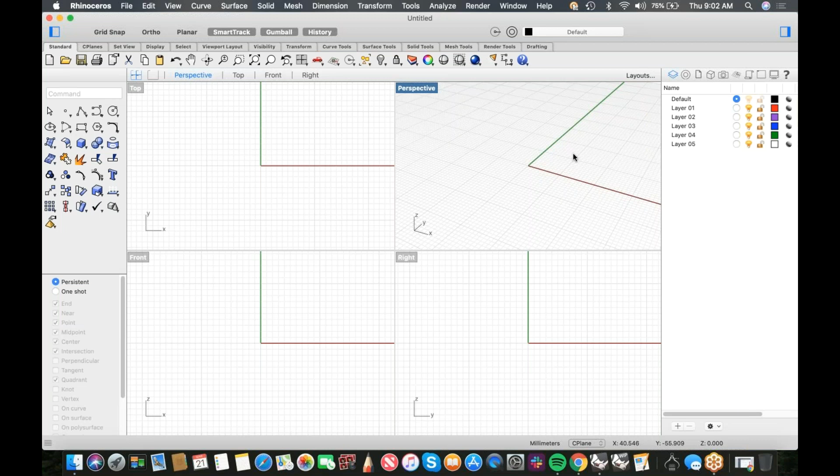So with that out of the way, let's talk a little bit about my setup here. If this looks different than your Mac Rhino setup, then what is possibly going on is that I am set up in the Windows theme. So if we go up here to settings, and preferences, and we go to themes down here, I'm set up Rhino for Windows. I primarily use Rhino for Windows, and so when I come over to the Mac side, I like to have the same kind of setup. I like the tabs at the top and stuff like that. It makes me feel safe and warm, so I use the Rhino for Windows setup on mine.

You can use either one, the Rhino for Mac, or you can set up your own custom, which would be a blend between the two. This requires a restart if you change this, so it's just the next session that you start up will have the different theme if you change from that, but this is why I'm running Rhino for Windows.

A few little differences between the Mac and the Windows side. We have these little drawers over here which turn the toolbars on and off, and same thing over here. Which makes it really convenient. You can set up hotspots on the edges of the screen. That's a Mac OS function. I don't have those set up. I find them a little distracting because I tend to work at the edges of the screen sometimes, and I find that a little disturbing, so I don't run that.

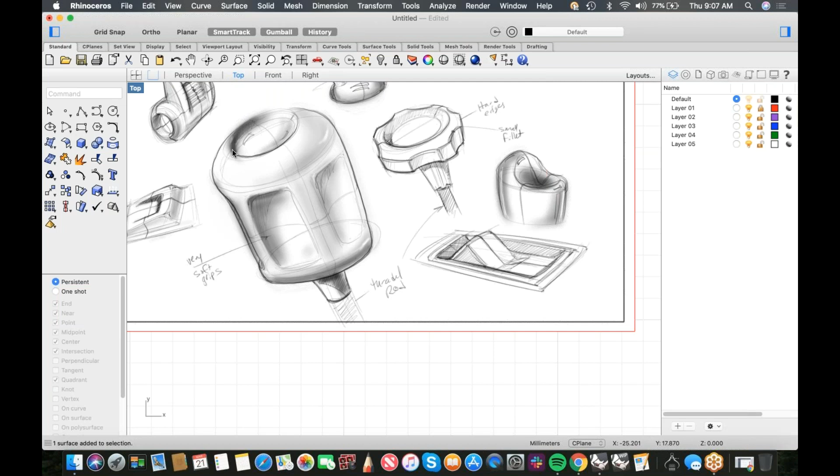And this shape, if we take a peek at it, it's got a little domed top on it. Maybe there's a label under a clear lens. And then it's got a little return here, and then maybe this breaks a little bit, and this is soft, and then it makes a soft turn here, and a soft turn here, and then it has this little barrel at the bottom, where we have a threaded rod poking out.

And I'll show you a cool trick for how to do threaded stuff. The trick is to never model it. We steal it from McMaster Carr, and that's actually a pretty fantastic resource that I'll show you. So the first thing I want to talk about is corners and NURBS. If you've done NURBS modeling for a while, maybe you already know it, but a surprising number of people don't understand this concept. Basically, NURBS corners require 3 points, right?

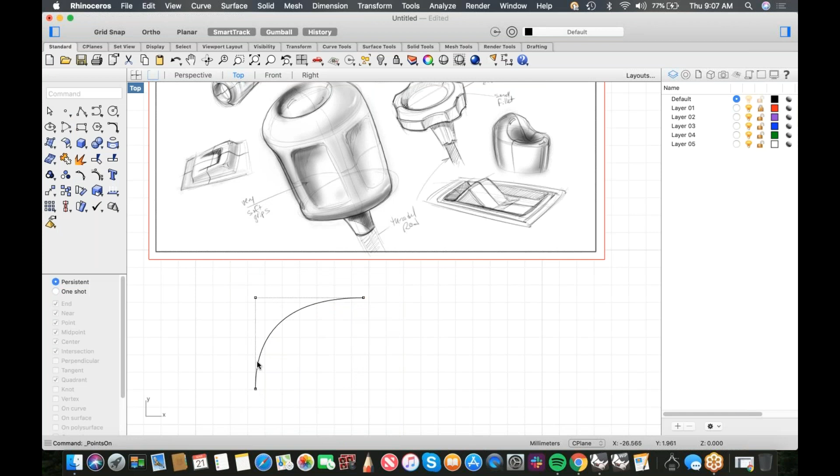If I turn the points on for this thing, I've got 1 point here, 1 point here, 1 point here, right? And if I move this point closer, it changes.

Now my dog's going to bark. Hang on, let me shut the door so she doesn't bother us. If you come to many of these webinars, my dog makes a frequent appearance in these. That's Lucy, the 3D modeling pit bull.

So if we're going to make a shape in another direction, 1, 2, 3. And I turn the points on for this. So I've got 1, 2, 3, 1, 2, 3, right? Now, if I do this with a single curve, I go 1, 2, 3. Now, if I want to start going down, I can actually steal this point and use it as one of my 3. So I can start coming down here, 2, 3. Now I can steal this one again, and I can come up here, 2, 3.

But the structure is the same. So my corner is 1, 2, 3. My corner is 1, 2, 3. My corner is 1, 2, 3. Right? So it's always in 3s.

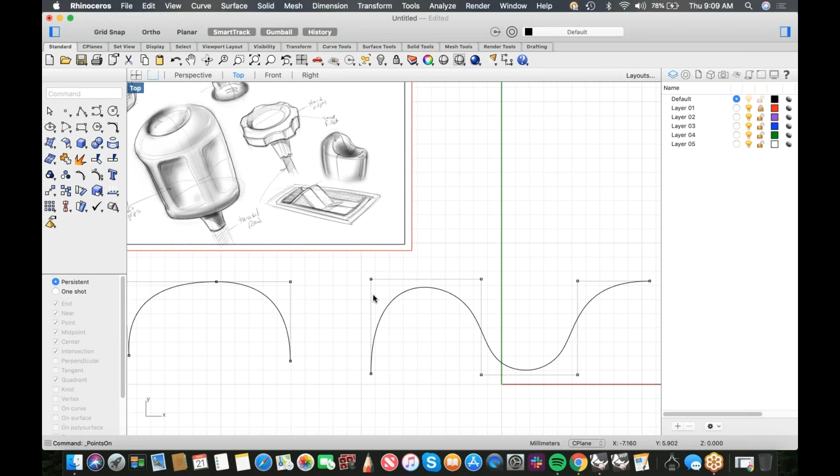Now, if we want to be able to isolate these, because I had to steal this point in order to make this corner, and I also have to steal this point to make this corner, they're kind of related. I have to isolate them. So that means I have to go 1, 2, 3, and then I need another point, 1, 2, 3.

And then I need another point, 1, and then I need, so that's that one, then I go 1, 2, 3, okay? So when I turn this on, now I've got 3 points here that make this corner, 3 points here that make this corner, and I can adjust it by pulling these closer together, farther apart, but I can also adjust the sharpness of the corner by pulling these points closer to the middle, right? Or I can soften it by pulling them farther apart.

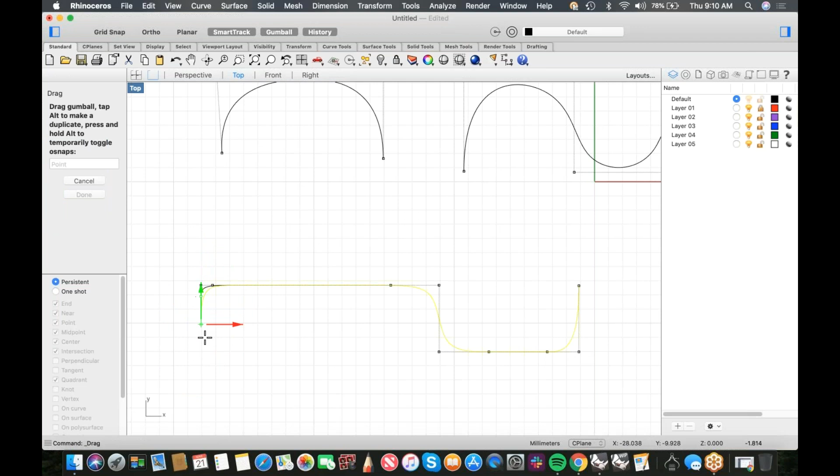And this is going to be an important thing to understand because the way this thing is built, basically we've got a corner, we've got a soft corner, we've got a soft corner, we've got a corner, and we got to isolate this from the next one, right? So I've got to have 1, 2, 3, 1, 2, 3, 1, 2, 3, 1, 2, 3, right? So I got to have 3, 6, 9, 12. I got to have about 12 points in order to make this thing happen.

And I did this video yesterday for the Windows side, so I have a little bit of a cheat built in already. And I know that when I revolve this thing, I want to have 49 isoparams in order to be able to get 6 divots in this thing. That's the way it worked out yesterday. So I'm going to spare you watching me do math, which is a painful process for all involved, and we'll just go from here. So let's start.

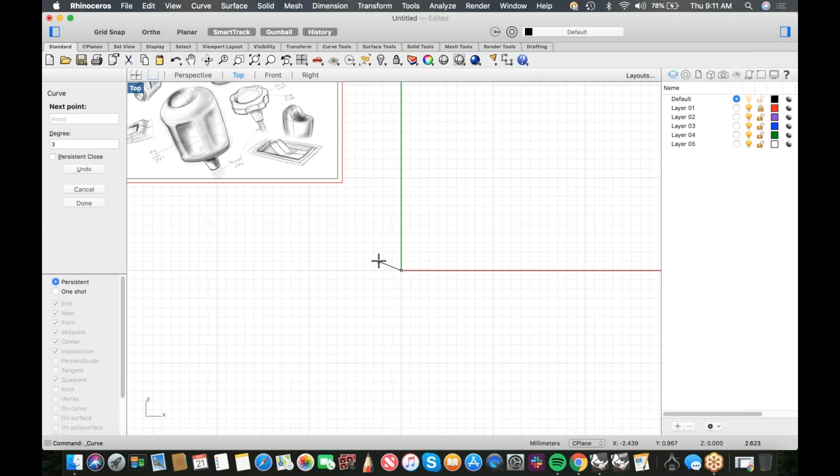I'm going to start at 0 just because it's easy, and I'm going to come out a little bit. Actually, no, I'm not going to do that because I want to get this bulge in here, right? So I'm going to start with a straight line, and maybe we'll turn on grid snap up here, and we'll start maybe here to here, and then I'm going to turn grid snap off, and then I'm going to mirror this around 0. And this is a nice way to make bulgy stuff.

And I'm going to use a 3-point arc because that one is super easy to use. So I'm going to snap it here and here. And then I know my center point is lined up right on the middle. So then I can decide how much bulge do I want this lens to have. And I want it just to have a little bit. So I'm going to just pull it something like this.

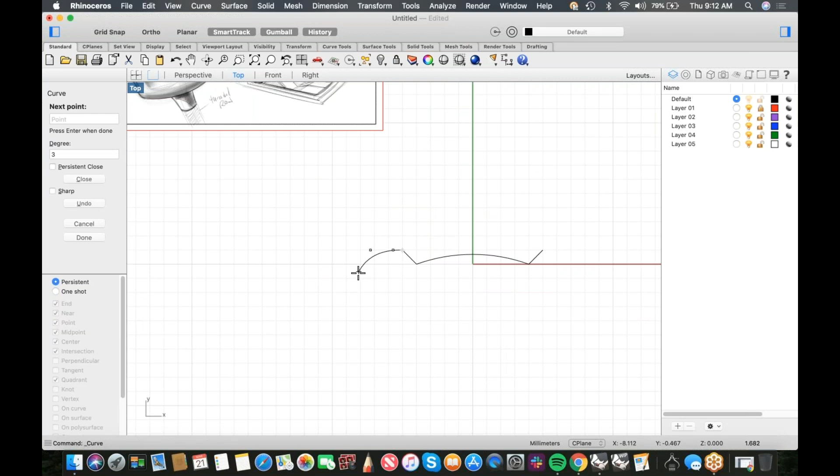Now I'm going to go back to control point curve, and I'm going to snap to here. I'm going to shift drag out from my first point. Now I got to make my first corner, right? I got to make this roll right here. So I'm going to start placing, maybe I'll do it close. 1, 2, 3. That's my corner. Now I'm going to come straight down to about here. 2, 3, that's my corner. And then I'm going to come back and I'm going to snap to the midline here. All right, so that's my shape.

And I'm going to set up a center line just to have it in place because it's nice for trimming, especially with revolved stuff. Use the trim command to get rid of this. And I'm just going to get rid of that because I don't need it anymore. And so now I've got the shape of my object, right? And I can decide, do I like this shape? Do I want to turn it?

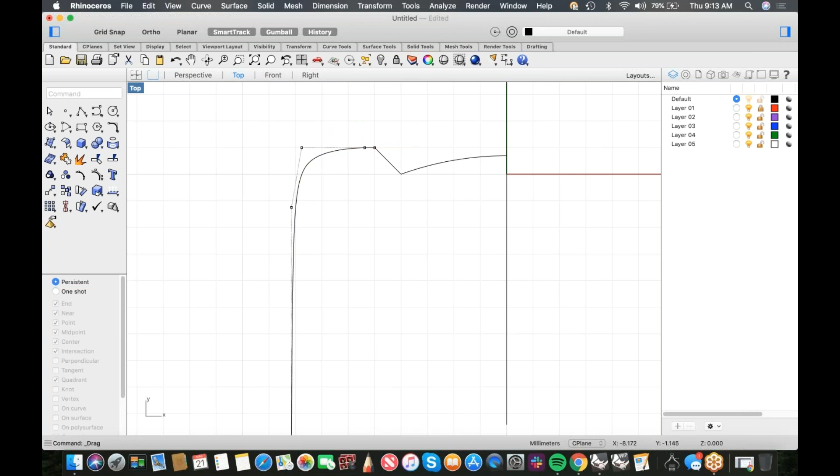Do I want to adjust it a little bit by moving this point? Maybe I want to sharpen that a little bit. Maybe I don't. Maybe I want to soften it a little bit. I can do that here. All right, so that 1, 2, 3 formula allows us to really focus on these corners and get them dialed in the way that we want. And I'm going to really soften this thing up a little bit. Join this up.

And then let's revolve it. Let's go to perspective view. And we'll just use the revolve command down here. And we'll snap from here to here. And then I want to just use a full circle. So I'm going to just roll this around like that. And this gives us the basis of what we want to mess with.

Now, this is a polysurface, so I can't turn points on. If I try to turn points on for this, it's going to say, can't turn points on for polysurfaces. See this down here? So I have to explode this, and I have to work on just this part. So I'm going to isolate that.

And if we turn the points on for this, you'll see that I don't really have enough points to mess with. So let's run the rebuild command. And let's rebuild this thing to 49. And then let's run it in the other direction.

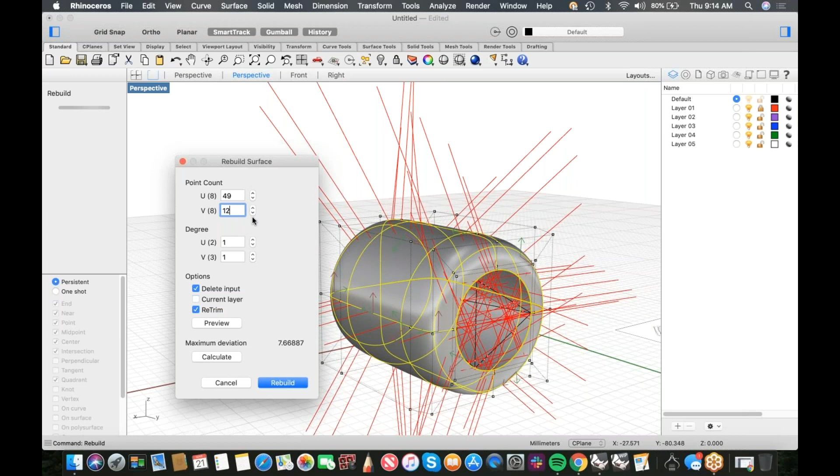I need to dip down, so I'm going to need 1, 2, 3, and then I got to come over. So I'm going to have another one, 4, 5, 6, 7, 8, 9, 10. Let's go about 12 points in that direction. And let's preview it to make sure that it did what we wanted to do. So that looks correct. So let's go ahead and rebuild it.

I'm going to delete the input, and now, oh, went degree 1. Don't want that. Let's rebuild that. Have to change the degree to 3. Otherwise I get facets, and I don't want facets. So let's preview that. That looks better. Let's rebuild that. All right, so now we've got enough points to work with, right? I've got stuff that I can play with now.

And so now what I want to do in the top view, I want to determine kind of where, let's get a point set up right on the origin. And actually this line of points is set up right on the origin, and that's actually the seam. And I don't want that seam to be the origin because I don't want a seam to be running through the center of my object.

By the way, I don't know if you know this, but there's a command called SrfSeam that you can actually move this seam anywhere you want. So if I put it over here, the seam moves from here to here. Sometimes that's useful in case you have to trim something through a closed surface. But I'm not going to worry about that.

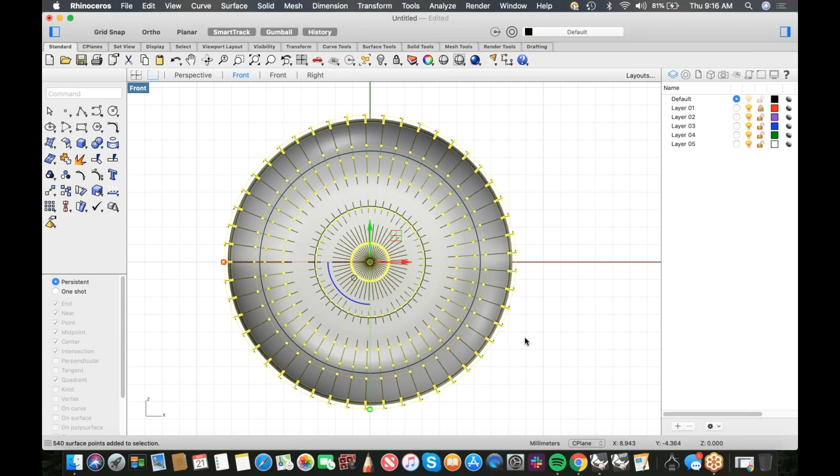But what I am going to do is I'm going to rotate it so this row of CVs is directly on one of these, because that's going to allow me to do some correct counting. So I'm going to rotate from 0. I'm going to snap to this point, and then I'm going to hold down Shift, and I'm just going to align that. Because now this is my symmetry point.

I can go 1, 2, 3. That's my center. 1, 2. So I can get like 5 points in this direction. But I'm gonna go a little farther. So I'm gonna pick these guys, and I'm gonna go 1, 2, 3 past the center point. So 1, 2, 3 over here. And then if I go to the top view, you can see that I've got these guys all selected, right?

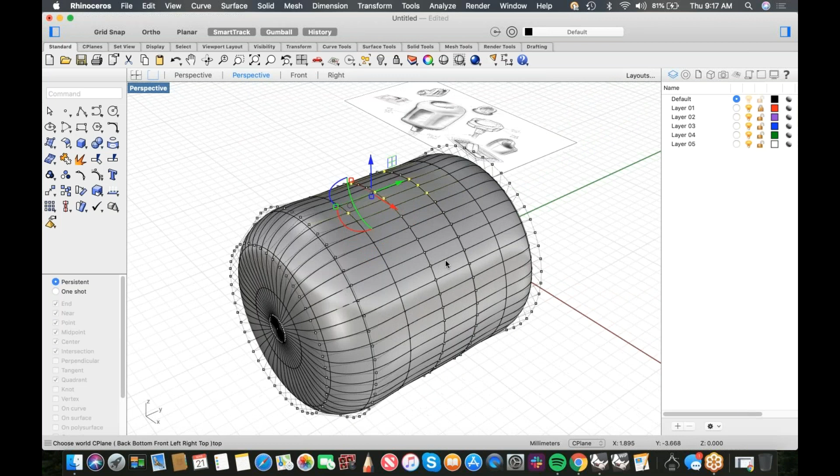Now I'm gonna deselect these guys because I don't want to mess with those up there, and I don't want to mess with these down here. So now I can go into perspective view, and I've got enough stuff that I can now start sculpting with this. And it looks like I missed a few. So let's go to wireframe, make sure I've got the ones that I want. Looks like I missed a few.

So let's do this. I'm going to drag select all of these, make sure I get them. And then I'll deselect in a different view. That looks better. Go back to shaded view so we can see what we're doing. Now we've got everybody selected. So now what I can do is I can just pull this straight down and add my soft little pillowy shape in there.

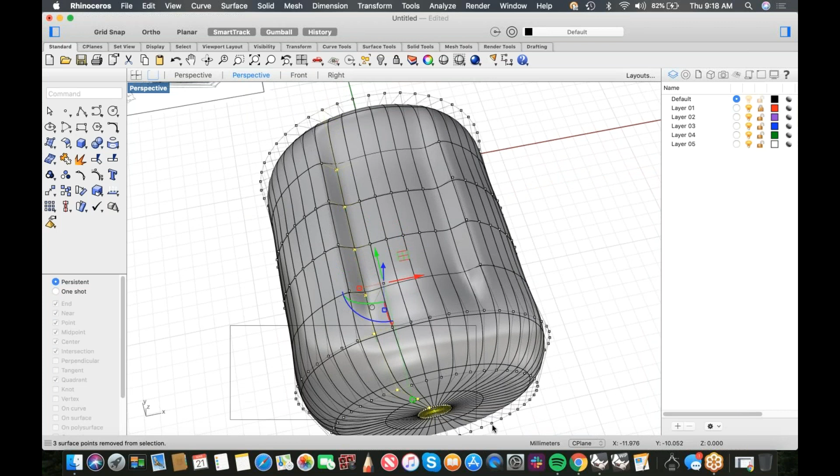And I can tune the design of this thing by grabbing these points. And if I deselect these guys, I can just grab one row of isoparams right here, right? So I can do SelV, and it selects everybody in that row. And then I Command drag to get rid of these because I don't want to mess with those. Now I can scale this, and actually I'll do the same thing here. Get those, and then I'll Command drag. The SelV and SelU are really useful for this kind of stuff.

And then I'm going to use the scale tool to scale those points in or out. And you can see how the shape of this and the softness of this is starting to change. If I want it to be a little rounder, I can pull these together. If I want it to be a little squarer, I can pull these out. It probably would make sense to grab all of these guys in here. But I kind of like the ability to be able to just play with the corner ones. Maybe not. Let's play with it a little more and see what we get. So let's grab these.

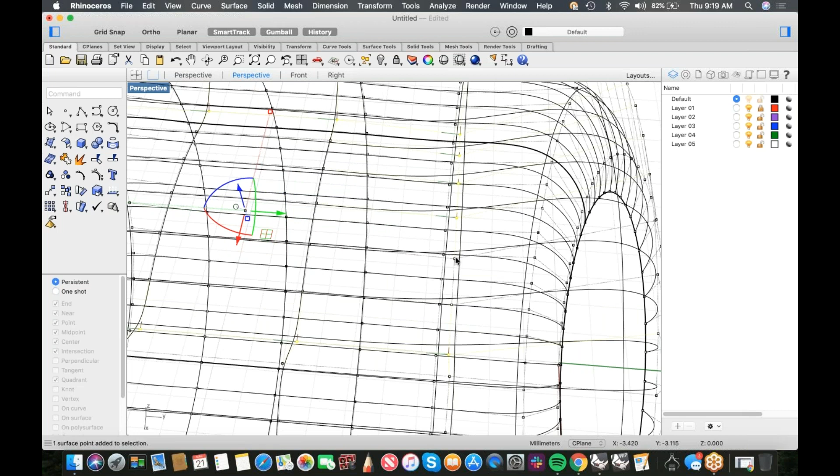And I'm not doing this over the entire model. I'm just doing this in a section because we're going to copy this. And so now I can scale this and see how that sharpens up, how it softens. Maybe I like the bottom one to be a little sharper, but the top one I want to be a little softer.

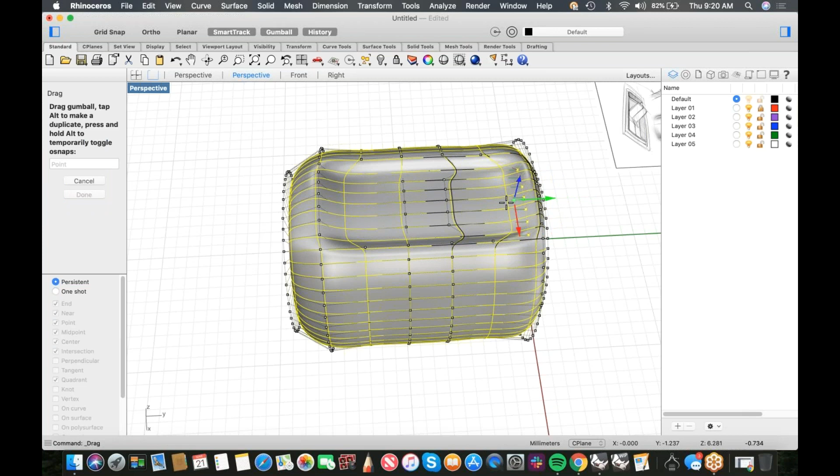Something like that. Maybe a little farther in. Oop, looks like I've got two selected down here. I don't want those. So let's deselect those. And these. There we go. Let's pull that down a little bit, make that nice and soft. So that kind of does about what I want it to do, right? So let's go back to our front view.

Got to make a nice grippy knob, right? So let's go back to our front view and let's talk about how to work on this thing a little bit. So if I decide that I want, let's start with a straight line, and let's divide this up so that we can trim it and then array the thing and pull it all back together. So let's say I wanted 6 of these guys.

Let's go to transform, array, polar. That's the center of the array. I want 6 of these. Actually, I want 12 of these. And we're going to go all the way around. And so you can see these lines, right, are kind of my steps. If I wanted to get 6 of these, 2 of these are going to equal one of these, one little grip area.

And it looks like I went a little far out here, because this is going to be a weird transition if I do 6 of these things, right? We can visualize this to see what it's going to look like. If I drag and hold down Command, I can isolate that with some surfaces and see. And I don't like how close this is. So I went out one row of CVs too far. So let's fix that. So let's go back into wireframe.

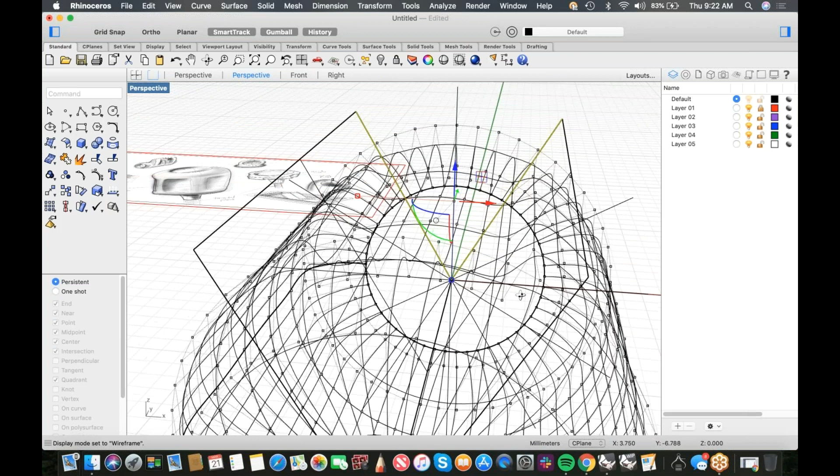Let's pick this row. Oops, it's on, sorry. Let's pick this row and this row, and we'll go SelV. And then we'll go to the top view, and we'll deselect these and these. It's important to make sure that you keep track of what you're doing when you're doing CV mods like this. And actually, it looks like I need to go one row over. It needs to be this row and this row.

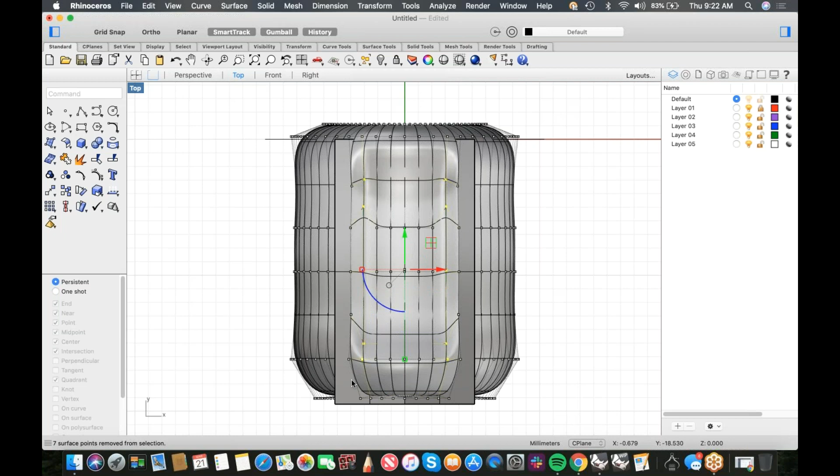See, I wasn't kidding when I said I didn't practice these. You thought I was making it up.

All right, now we can pull this back up, give ourselves a little bit more landing space. So that I feel a little bit better about, because now we're going to have a little bit of space. This is going to be doubled, so it's going to make a little bit more sense like that, right? So I feel pretty okay about that. Maybe we'll even pull this guy and this guy up a little bit more. Line that all up.

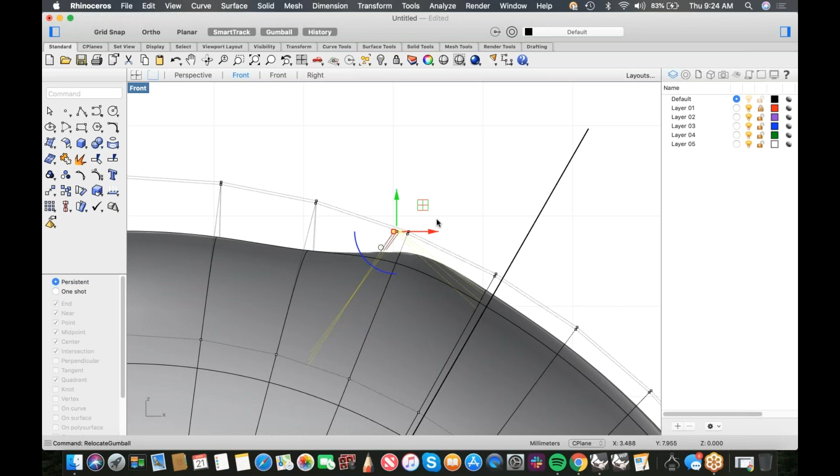Now, we can line all of these up. If I pick all of these, we can use Gumball to reline these things all back up. So if I go into the front view, if I want all of these to line up with one or the other of these, I can relocate the gumball to be here, and then I can scale these to 0, and it will flatten all of those to the same spot. And then I can use my little waffle to decide exactly how I want that to come together. See that?

So let's do the same thing over here. Let's grab all of these guys. So B, Command drag to get rid of the ones that we don't want to mess with. Go back to front view. I'm going to relocate my gumball to here, and then I'm going to scale to 0. Oops, looks like I got one down here that I don't want. So I'm going to deselect that one. Relocate gumball.

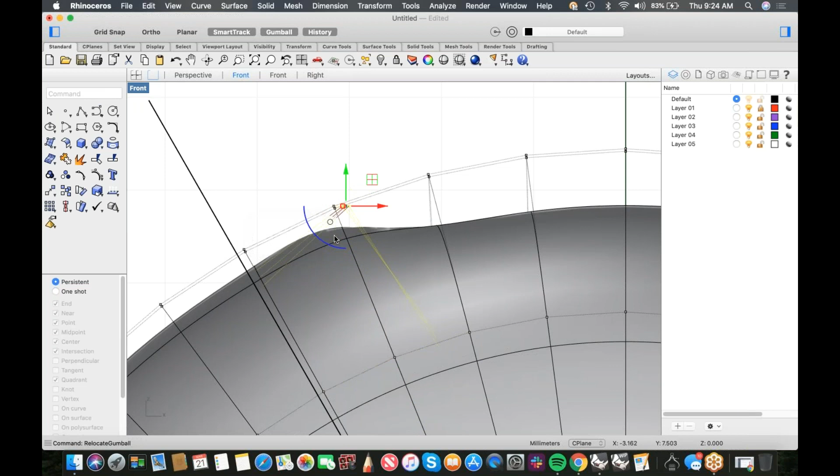Scale to 0. It'll line all those guys back up, and then I can use my C-plane icon to do the finer sculpting on that. All right, now, I know I've already got these planes set up, so why don't we go ahead and use them? I'm just going to make them longer so that they go all the way through. And then let's trim all the rest of this off.

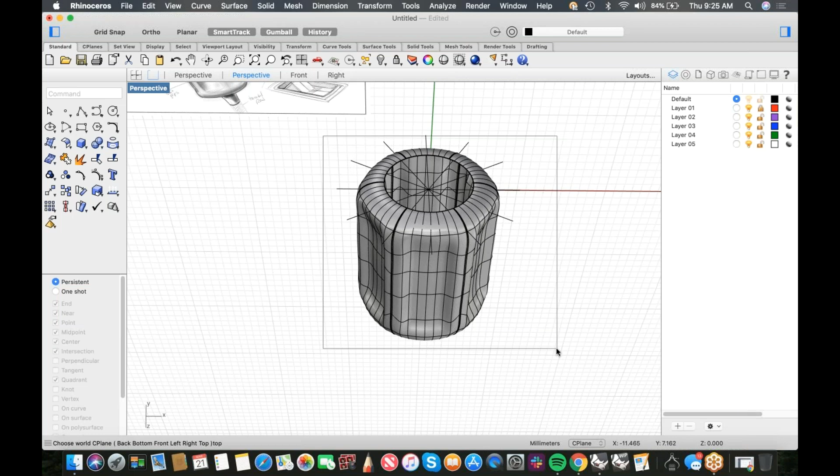Then I can just simply go here, transform array polar, 6 objects, and that will finish this thing up. Get rid of these planes. Now, if we're living right, I should be able to grab all this stuff and join it. And show our edges.

And it looks like I'm a little off on one of my, unless I didn't join it. So it looks like I'm a little off here. So I can use the match surf command. Actually, I can't use match because it's a trim surface. So let's see why we're off. And it looks like I wasn't exactly perfectly aligned edge to edge.

So let's do this a different way. Let's just split this guy in half. Pick one side or the other. We'll just pick this side. Let's mirror this around 0. Join that. Now this should be the same side to side. Now if we transform array polar, it should all line up.

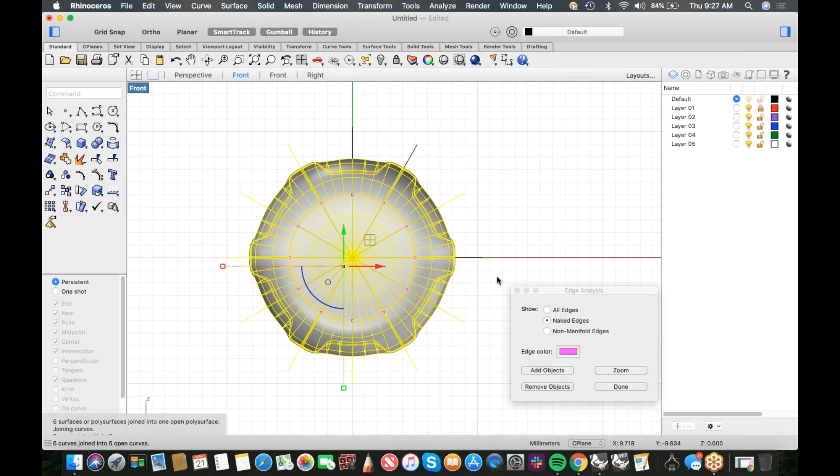Now, there we go. All right. So I wasn't as careful as I needed to be to get these things side to side in order to line up. But I was able to recover from that. All right, so we've got this thing. Let's bring the rest of our stuff back. If everything is going well, we should be able to join those two together.

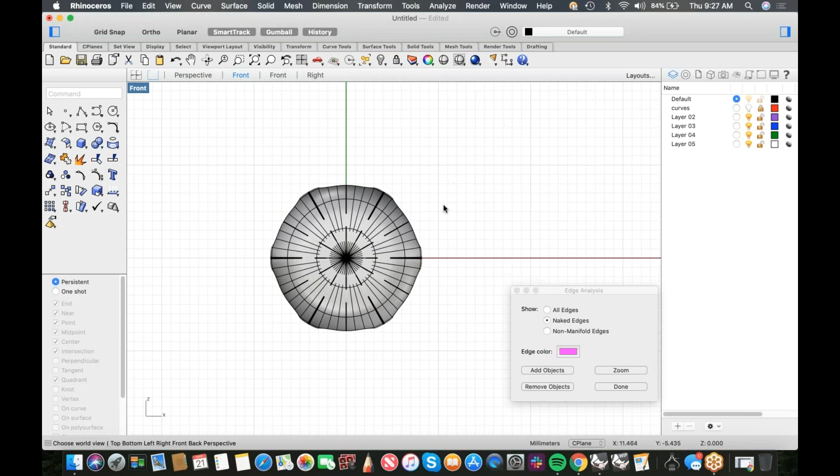And it did. I'm going to take my curves and just throw them on a layer. I always keep my curves, because if your clients are anything like mine, they like to make changes. So throw that all there. And then let's go ahead and make the bezel. Nope, which view am I in? Top view. And let's make the little hosel thing down here.

And I'm going to do that just with a circle, or with a cylinder. I'm going to just snap this to the end of this, and I'm going to bring it out something like that. And then as far as the direction is concerned, I'm going to change this to none and then use the shift key to bring that out like that. I'm going to just take it and poke it in a little bit because I'm going to Boolean this whole thing together. And then I'm going to do a sub-object selection.

Now, if you don't know what sub-object selection is, if you hold down Shift Command and click on a part of a poly surface, this is a poly surface, you can modify it. If I shift drag on this, I can add a little taper to that thing. Cool things about this. There's a great video called Hello Gumball that Brian James did that will show you all the Gumball superpowers. So let's Boolean these two together. And then I'm going to just throw a variable radius blend on this edge, and I'm going to chain it.

Sorry, my voice is misbehaving. Let me mute for a second. All right, little swig of coffee makes it all better.

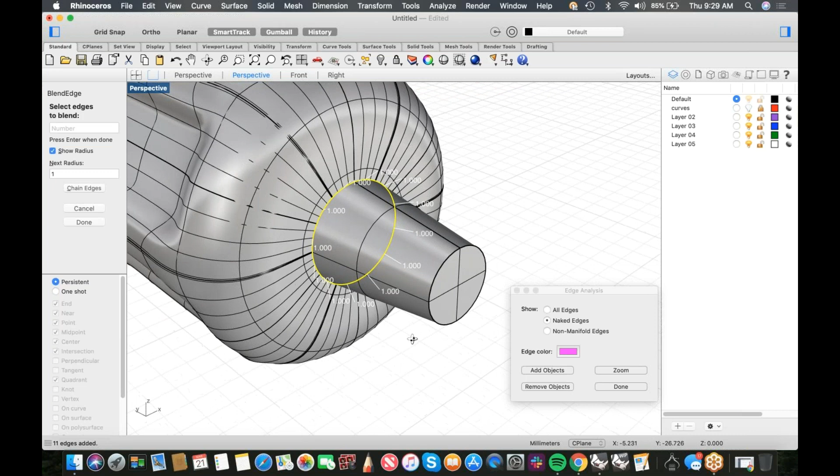So we'll go ahead and run this, and that's probably a decent amount of blendiness. So we've got our kind of knob. Okay, and we could have spent a little bit more time focusing on the transition in or out of there, things like that, but it looks like there's a little tangent issue here that we may have wanted to make sure that these points are all lined up.

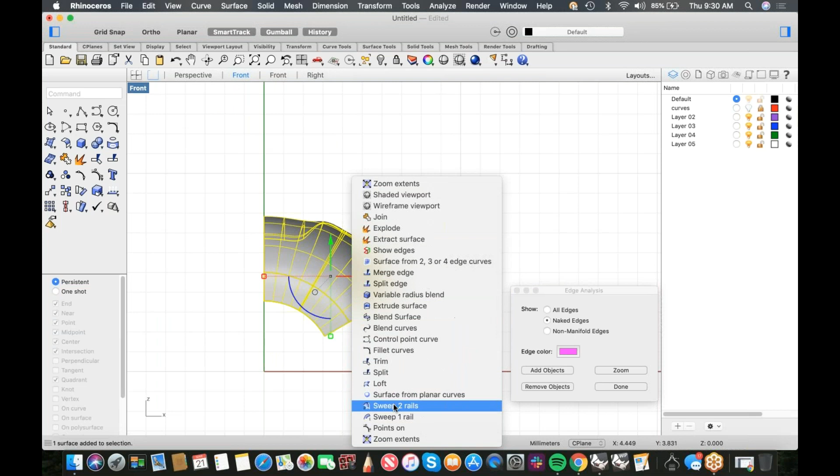If we wanted to fix that, if I explode this thing, I won't do it on all of it, but I'll just show you what the issue is. So if I go here and I turn these points on, these points, in order for them to be tangent across the center line, have to all be lined up. So we'd have to do a little bit of tangency adjustment here in order to get that perfectly correct.

Or if you were really fussy and you wanted to really nail this down, you could actually cut a slice out of this and then use the blend tool to blend over this. You know, we could do something like this. And I would obviously do this with symmetry and all that stuff, but I'm moving quickly. We would just trim a slice out of this and then use the blend surface. This is my go-to for fixing tangency issues.

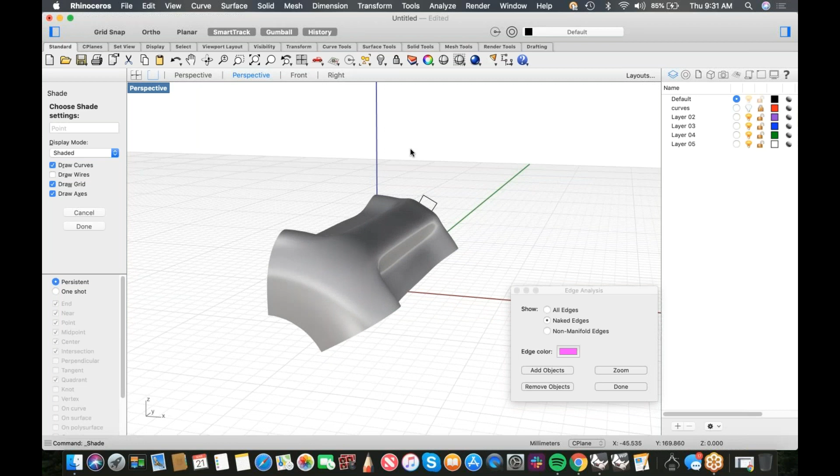All right, so now if we looked at this, our tangency issue is gone. See that? So then what I would do is I would just mirror that slice around and do the same thing we did before. All right, so I'm going to back up. I'm going to take that out just so everything joins still. But that would be the fix for that if you were looking to fix that.

All right, so the last thing I want to do is I want to break this thing off. I want to break this lens off. And so what I'm going to do is I'm going to shift command click this and do a sub-object selection. And I'm going to start pulling on this, and then I'm going to tap option. See how that plus sign shows up? That actually makes a little copy of this.

And then what I'm going to do is I'm going to shift command click this, and I'm going to start dragging this down and hold down command. And what that's going to do is it's actually going to extrude this into the model just a little bit. See that? See how it added that little piece? So now what I can do is I can take this, click start dragging, hold down command, add a little bit of thickness to that, and then I can just take this thing and tuck it right back in here.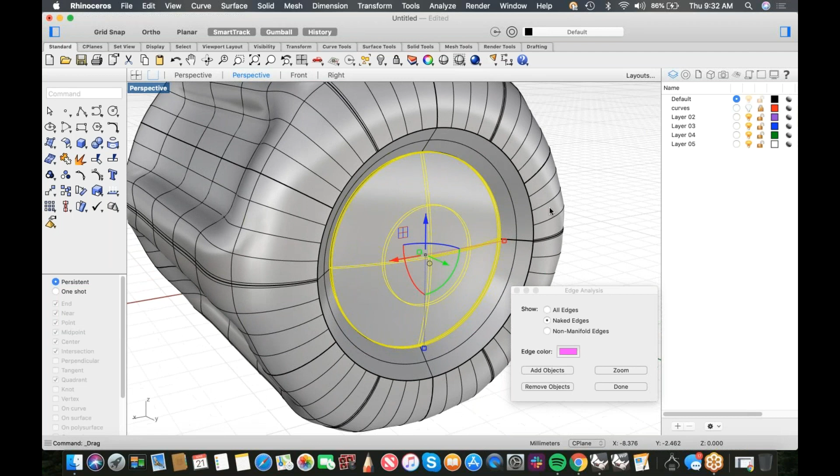And I'm going to scale it just a tiny bit, just to give myself a little bit of clearance in there, so if I printed it, it would fit. And then that way I've got my lens and stuff all set up. Now let's go to wireframe, go to the top view, and just make sure that these things are in position the way we want. It's still sticking out a little far, so I'm going to just bring it in right like that. And I'm going to just leave the tiniest little kissing distance in between here, so I could fit a label or do whatever I wanted in there, right? So that gives me this nice soft little handle.

Now, talk about threaded stuff. And threaded stuff, this is one of my favorite tricks. I show this every time I do videos that have threaded stuff in them. If I go to McMaster-Carr, and anybody who's from outside the United States, if you don't know about McMaster-Carr, McMaster-Carr is like the clearinghouse for all things nuts and bolts. And it's a company in, I think it's Wisconsin or something like that. Anyway, you can see that they have everything that you could possibly imagine as far as industrial supplies and fasteners and pulleys and belts and gears and retaining rings and all the springs and everything.

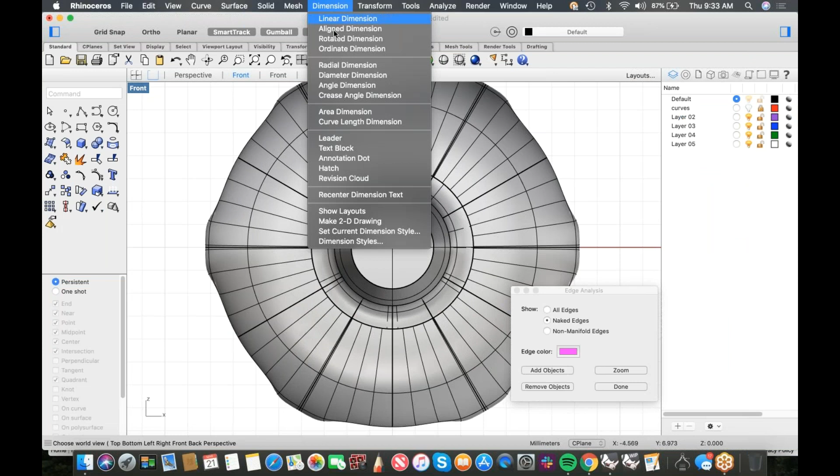And the cool thing about this is if I pick one of these, right, and I say threaded rods, and I say I want metric, and I have no idea how big I built this thing. Let's check that first. Let's do a dimension here so we know what size we're dealing with. So it's 3.62 inches. That's pretty massive. So let's bring this down. Let's scale this down significantly. Like that. Actually, it would help if I grabbed everything. Something like that. And then, so that's 1.75. That's still really big. This knob is massive.

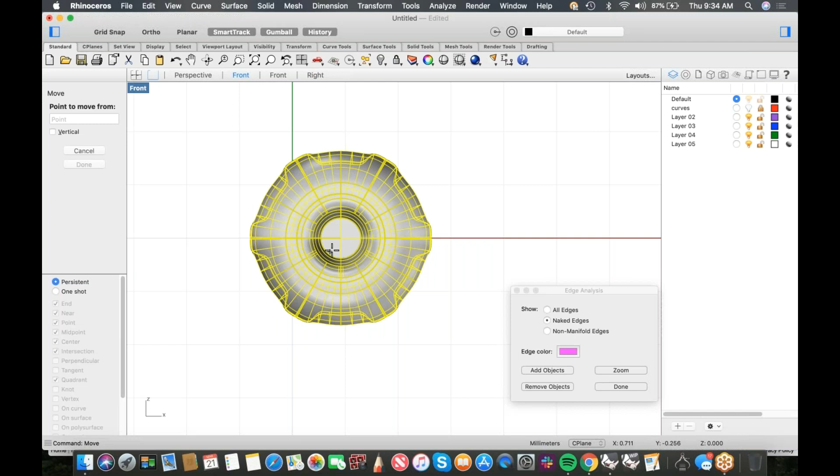Let's put it back where we found it. Let's move this back to 0 since I, nope. I'll move from here to 0. Let's put it back in 0. All right, now let's measure this and see. I just want to get something that's like mildly reasonable. All right, so that's 3/4 of an inch. So let's go back to McMaster-Carr and let's go back a page and not do metric. We'll do inches because we're in the US and we do dumb things. So we said 3/4 of an inch.

So if we come down here, let's grab a 5/8 by 11. We can say we want this thing to be 4 inches long. This is the money right here. Product detail. Anything that has this product detail with this little CAD symbol, click on it, roll down to the bottom, and there's a drop down on here where we can download this thing to our system. There we go. And then we can show this in the Finder. And then we can just drag that from here into Rhino.

Oh, no drag and drop, you dog. All right, that's fine. So we'll do file import. And we'll go to downloads, find this, import it. Yes. No, I did not want to scale it. Sorry. Import. Usually, if I'm going to bring millimeter stuff in, I work in millimeters.

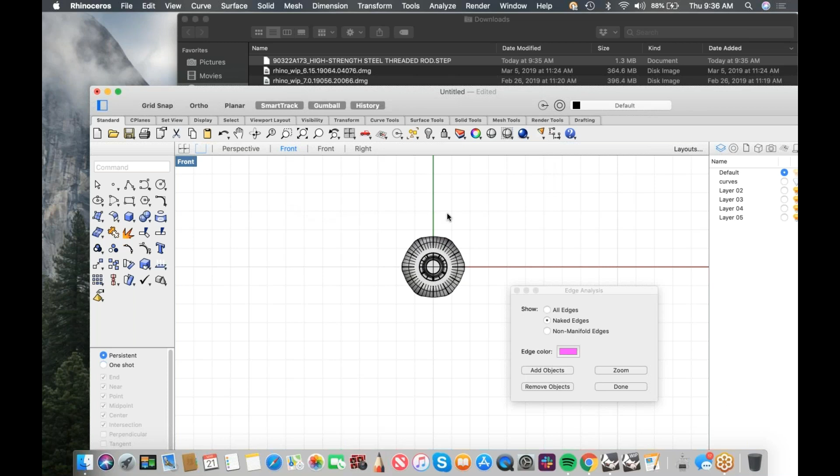All right, so there's my threaded rod. And the cool thing about this is, check it out. It's completely watertight. So if I add these objects and I look for naked edges, there are none. It's all watertight, ready to roll, which means I can do this,

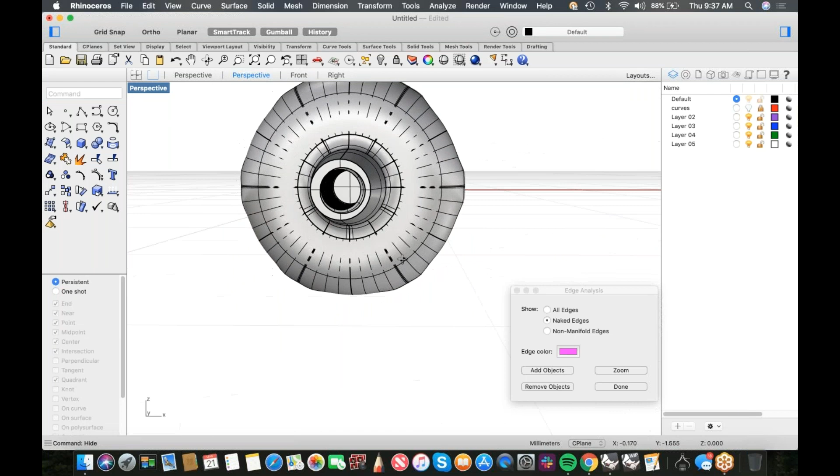poke it into my model, and if I'm going to print this for real, this is the coolest thing about this: if I come up here and do a Boolean on this, right? The Boolean, first of all, works really well. These threads are mechanically perfect. So let's say I print this on a MakerBot that's got some ish factor as far as how accurate the print is, no offense to MakerBot, but PLA printers can only be so accurate.

You can run a tap through this to clean these threads out after it gets printed, and this threaded rod will go in just with your fingers. It'll go in perfectly. And so I actually have a file of a bunch of these things, of the metric ones. And when I print stuff that has to be bolted together, I'll build my screw bosses and then I'll punch these things in there and Boolean them out.

And then when I print the part, I'll just grab a tap of the correct size and I'll tap all those things out, and you can screw your parts together. They just go together perfectly. The threads are perfect. They're nice and clean. There's no resistance on them. They tighten up nicely. So you never, ever have to model threads ever again. It's all right here. Okay, so that's my McMaster-Carr trick for threads.

And the cool thing about this, if you dig through this catalog, it's got nuts and bolts and everything that you could possibly imagine. U-bolts, eye bolts, screw bolts, washers, shims, springs, and all of this stuff is cool because when you download the part and put it in your model, if you build this to use the piece that you've downloaded from here, you can just buy this part straight from them, and by the time the thing's out of the printer, the parts will be in your mailbox, and you can just stick them in there.

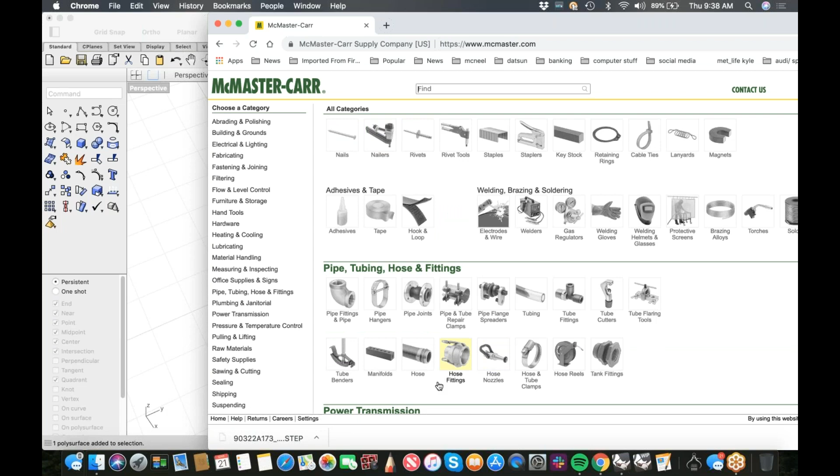So if you design these with springs that come from this company, or gears, or anything else that you wanted to do, all of this stuff works because the CAD models are exactly built off of the pieces that they're using. So there's manifolds and pipe fittings and everything you could possibly imagine in here. So I use this pretty exclusively anytime I have to assemble or build anything.

How are we doing for questions? Any questions so far? We do like to have these kind of be interactive, so if you have any questions, definitely hit the chat and let me know. All right, so let's take a look at another one.

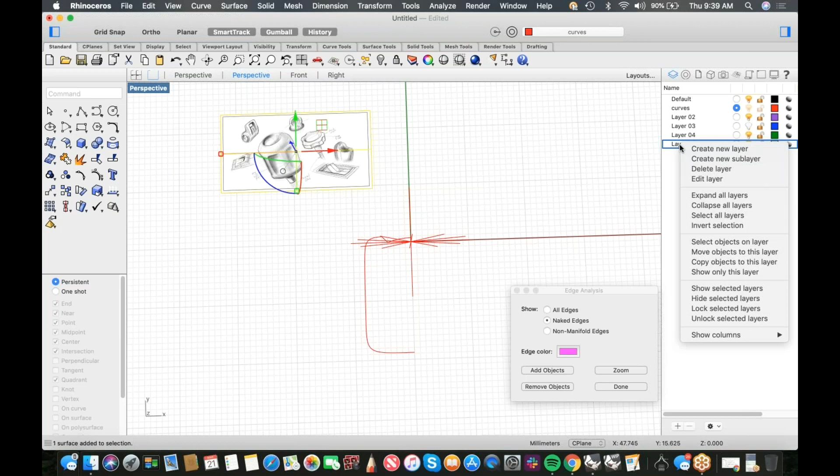So this is, where are we at, 939? Let's take this guy and stick him on a layer. Move object to this layer, and then let's hide it. Oh, looks like I put the curves and the images on the same layer. Let's fix that. Let's move the image to this layer. There we go. That way we can hide the curves and lock the image. There we go.

Okay, so let's take a look at another one. Let's build this guy here. I like this one. This is actually part of the level 2 class, there's actually an exercise to do this. Building things that are round and seamless like this, you could start with a sphere and possibly deform this and get this shape, but there's actually an easier way to do it.

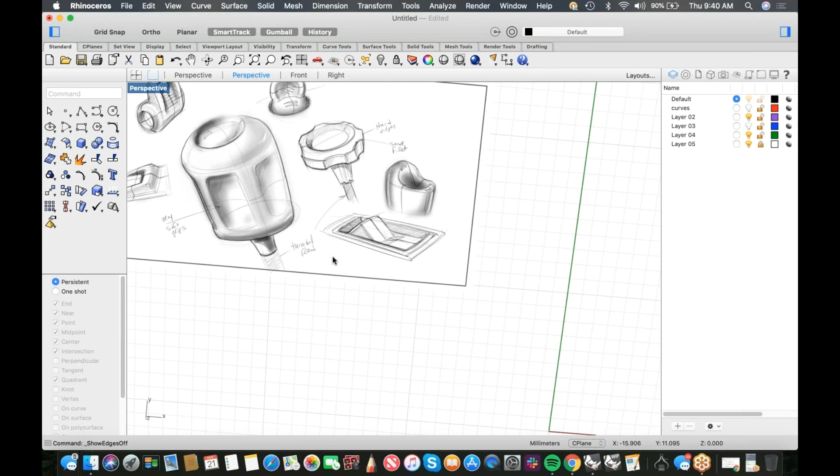And by the way, the trick for building stuff that has rounded ends on it is to start with the rounded end first and then build off of it, instead of trying to build this object and then figure out a way to put the round end on it. Start with the round end first and then go backwards if you're using the sphere method. But this thing is actually kind of a cool little exercise, because we can do this.

Let's start with an ellipse. And I'm going to just drag, hold down Command to extrude this, and then I'm going to Shift Command click and make this a little bit bigger. And then I've got a nice little tapered thing on it, right? So now the trick is to try and figure out, well, how do I model a rounded end on this thing?

Well, if I place a couple of points, I'm going to place one at 0, and then I'm going to move it out here, and then I'm going to do it again. Place another point at 0, and then I'm going to take these guys. And I'm just doing it this way because Gumball makes it super easy to place stuff in space and have it be aligned precisely. So I'm going to stick these 2 points kind of out here in space. And we want to make sure and run with history on when we do this. And then we're going to come over here and grab the patch tool.

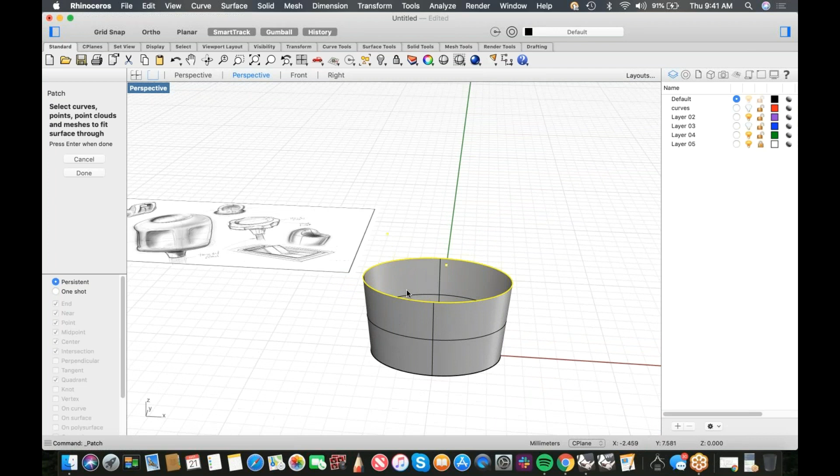And patch allows us to use edges, curves, points, all sorts of stuff as reference. And if I run this thing, let's just do it at 10 and 10 with a stiffness of 1. The stiffness setting is, think of it as a sheet of rubber: a very thin sheet of rubber or a low stiffness rating is going to be really floppy like a balloon, where a high stiffness rating, something like 7, 8, 9, 10, is going to be like a really thick piece of a tire or something like that, and it's going to be harder to bend it.

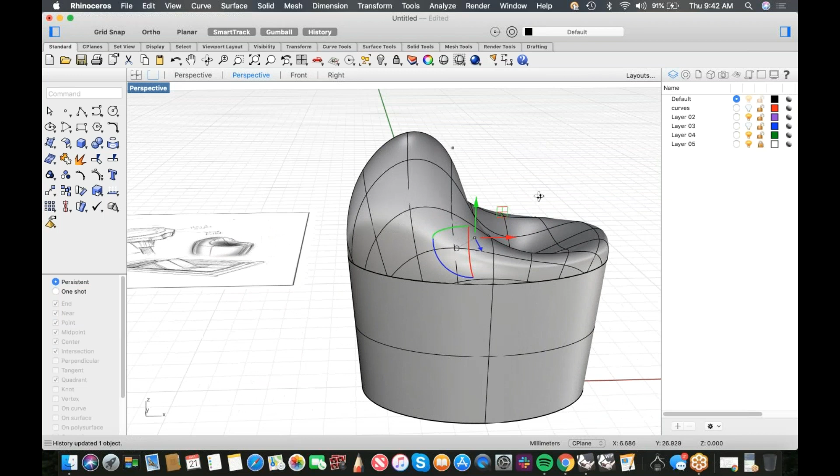So let's start with something like this and let's preview it and see what we get. And that actually is going to work out pretty well, so let's run it. Now the coolest part about this is because we ran it with history, I can grab this point and I can start adjusting this. So if I want this to be really dramatic, I can do something like that, which makes for a really nice kind of rounded knob.

And then the downside of patch is because it's a sample point thing, if I turn my edges on, there's a very good chance that this and this won't join, because this is just not accurate enough around the edge. So there's 2 ways to fix this. The first way would be to just grab a loft, and just loft from the edge of this thing back to the original curve and run that and then say match the start tangent. That would do it, right?

If I get rid of the original, I think I might have gotten rid of the wrong one. That one I want to get rid of. So this is our loft. That should join, and it does. And it looks pretty good. I'm catching a little inflection right on the edge of this. See this? I don't know if you can see that right there and right there. So that's okay, but it's not awesome. So let's do it a different way.

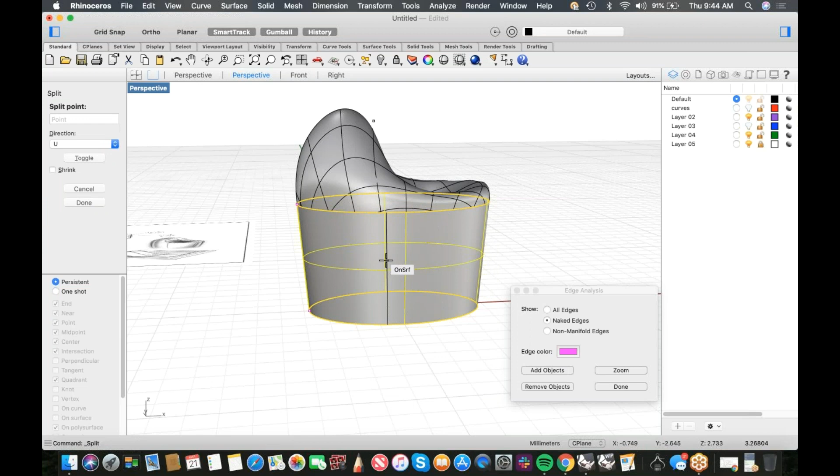The other thing that we can do is we can split by an isoparam, and we can make some room in here, and I can blend now between, my blend surface is down here somewhere, there we go. Blend between these two with tangency. That's probably going to be a pretty decent result. That will join. Ooh, it didn't. That's intriguing. Let's try it again. It should have joined. That's why we do these live. I make the mistakes so you don't have to.

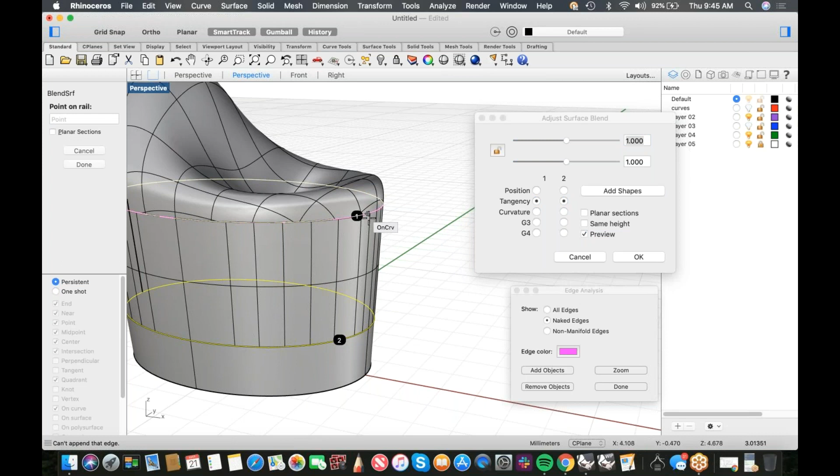So let's blend between these two. And let's add another shape over here just to have a little bit more control. And let's see if that'll join. No. All right, so this is not a trimmed surface, so I can run match surf on this. And I want it to be tangent, and we'll let it refine. Ooh, needs a lot more. I must be running a super high tolerance on this file.

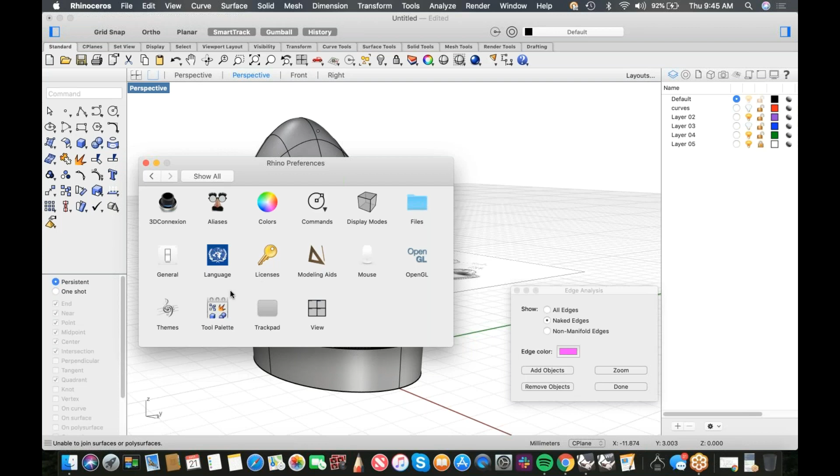Let me see what my tolerances are. I might have unreasonably high tolerances on this. My units. Yeah, see, I'm running 0.001 millimeters. That's kind of unreasonable. If you look at what 0.001 millimeters is on a set of calipers, for most product design that's probably a little insane. So I'm going to drop a 0 and go 0.01. Now, Rhino will do this. It's not like Rhino's not accurate, it can't do it. It's just the effort that it takes to do that is not useful in most situations.

So let's see if this will join. And in this case, it does. Okay, so let's go and take a look at this now. This is a much better result. I'm losing that little inflection that was at that edge. Now, the other way to do this is, if I untrim this, is to do what's called a pipe trim. I want to untrim. Nope. I always get those backwards. Untrim that. The other thing is called a pipe trim, and this is a trick I stole from.

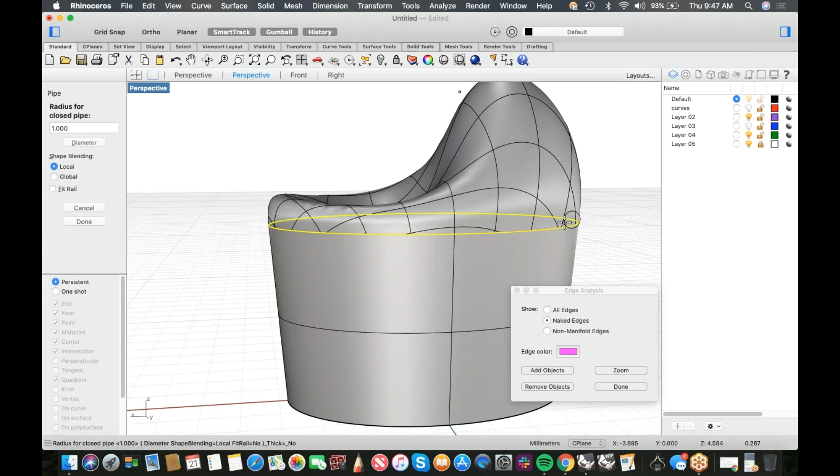Oh, my brain's shut off. James Carruthers. I was trying to give him a shout out because I stole this from him. He used to have these great videos out that were called Form versus Shape, and I learned a lot from them early on in my career. So I was trying to shout him out when I use this. He probably didn't invent it, but that's where I learned it from. So I was trying to give him credit. Plus, he's an incredibly nice guy. So James, if you're out there, props to you.

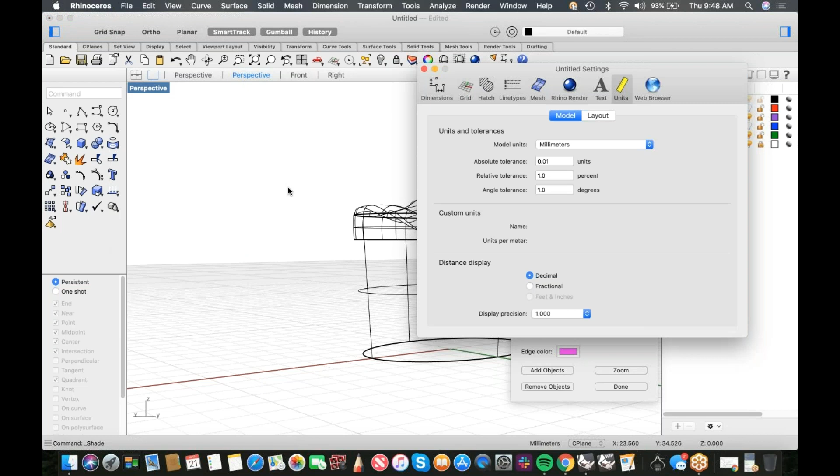Blend surface from here to here, and what we do is we use the pipe in order to make a really nice gap, which then allows us to make a blend in there to make that nice and smooth. Now, I think my render mesh is probably a little coarse, so let's check that. Yeah, so let me run this smoother and slower, and that'll give us a little bit better display. All right, so that's nice and clean.

And if I emap this, I get really nice, clean reflections. See that? So that's a way that we can do seamless. There's a little mesh artifact right here. Let's adjust the mesh. See that? That little inflection is caused by this mesh polygon. So let's crank this up a little bit. So that goes away now. So you have to make sure that what you're seeing is real and not a mesh artifact.

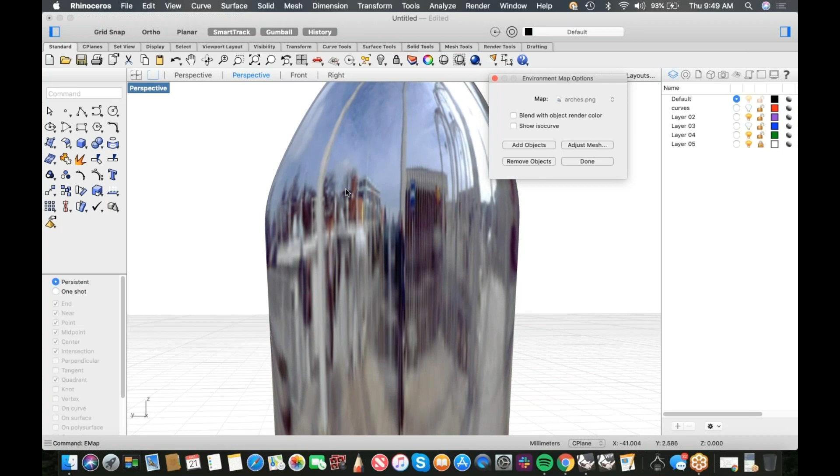And it looks like, if we're being fussy, there might be a little inflection right through here, which means that we might need to give this a little bit more room to run. So maybe we peel this back or whatever. Anyways, but you get the idea. All right. So let's take this guy. Let's throw this on a layer. And I'm going to throw these on the curves. And let's go back to our image and see what else we've got to build.

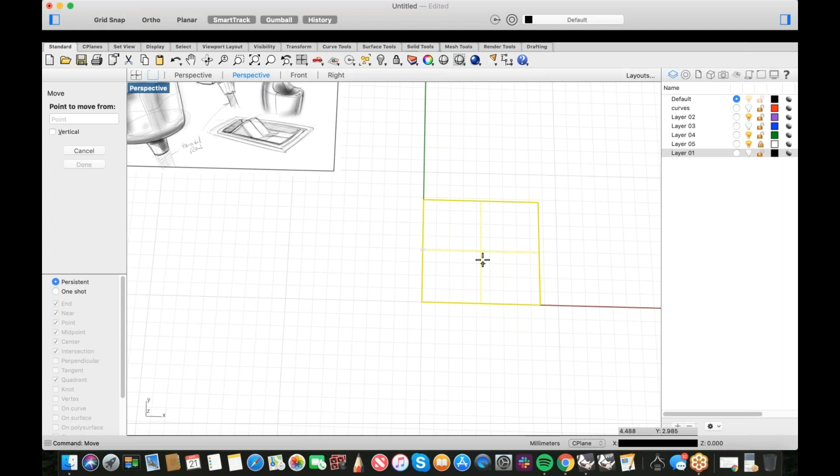So let's build this guy here. I like this one too because it gives us an opportunity to talk about a different formula for building stuff like this. And then if we have time, maybe I'll jump into this guy up here. So let's look at this guy. Basically there's a formula for building stuff like this, and there's a cool way to do this using deformers in Rhino. So let's jump into that. So I'm going to start with a four-sided surface. Like this. And I'm going to just stick this in at the origin. Find its center and move to 0.

And then I'm going to change its degree because it's a degree 1 surface right now, so I'm going to make it a degree 3 surface because that is going to give me some points that I can mess with. We'll do points on, and I'm going to grab this direction and this direction, and I'm just going to pull that just a little bit. And what it's going to do is just give me a little shape to this thing, right? I want to just add a little crown to that thing in both directions.

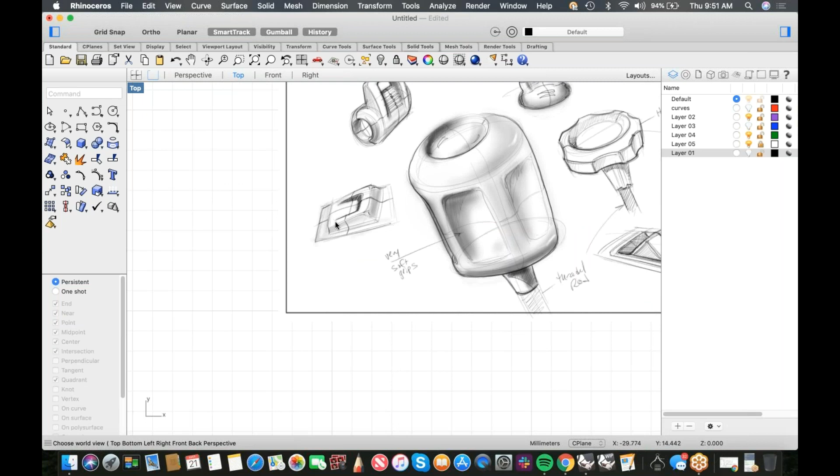And now what we'll do is we'll lay this thing out. I know the drawing shows this raised like that, but that's easier to do. Let's do this where this edge is tangent to this surface. And the way to do that is I'm going to start at 0. I'm going to come out to here, and then I'm going to say 1, 2, 3. There's my corners, right? I'm always counting corners. And I'm going to bring this up here like this. I'm going to mirror it around 0. And that's the outside of my object, right? That's the first trim. I'm going to join these together.

I'm going to copy paste, and I'm going to shift drag on the scale handle to bring this in. This is going to be the upper surface of my part. I'm going to turn the points on, grab these, and I'm going to bring this out and snap them to the end so all these line up. By the way, if your gumball is not snapping, there's a setting for gumball called snappy dragging, which is what you want to enable. And the gumball settings in Mac are, let's see, I think I can just type it. Gumball settings. It's in one of these settings.

Might be in the general one. I might have to look that up. I know where it is, not on the Mac, on the Windows side, but modeling aids. Nope. All right, I'm not going to bore you with me digging through here, but there's a setting.

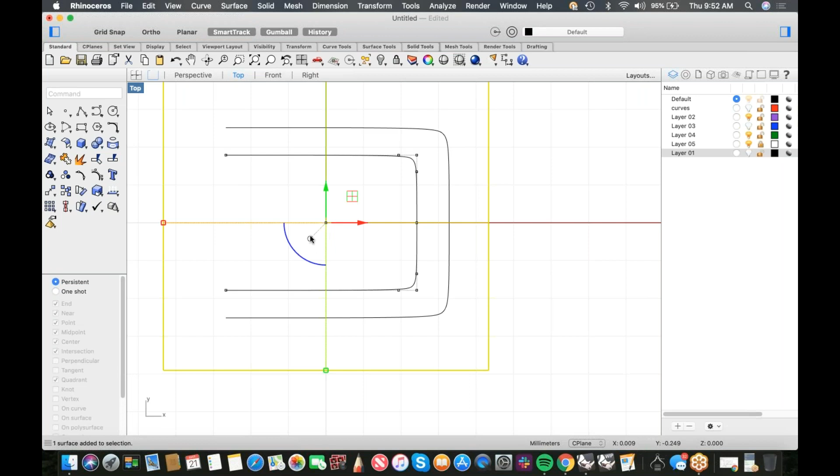There's a setting in Gumball called snappy dragging, and if we have a bunny tail, oh, duh, it's on the bunny tail. Smooth dragging and snappy dragging. You want to set this to snappy dragging. And what that'll do is that will allow the gumball center to respond to OSnaps so you can place it more precisely. All right, so that's that.

Now we need to close this off. I'm going to just snap from here to here. And then this piece also has a little subsection in it. And so I'm going to take this and copy paste, shift drag. That's the outside of that. Paste, shift drag. That's the inside of that.

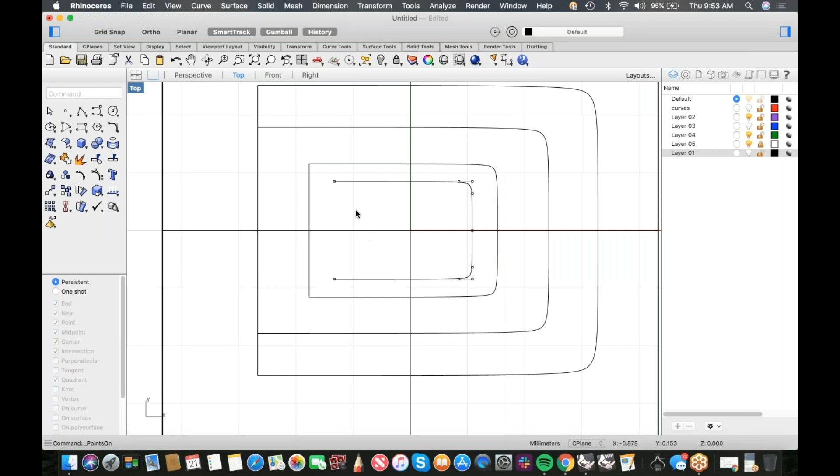Same thing again. I'm going to snap from here to here and then turn the points on for this down here. And gumball, snappy dragging. I'm going to snap it to there. And so now we're set up. We have everything that we need in order to build this thing. And we're going to use shrink trimmed surface, which is something you might not have seen before, and deformers to do this. So let's go and split this.

This is the object we're going to split, and we're going to split it using all of these curves. And I'm going to delete the places where there's going to be gaps, which are these. And then I'm going to go, actually, I went too far. Sorry. I made the same mistake yesterday. Got to do it in 2 pieces. So I'm going to split using this. And I want to get rid of this first. And I'll do this shaded so you can see what's going on.

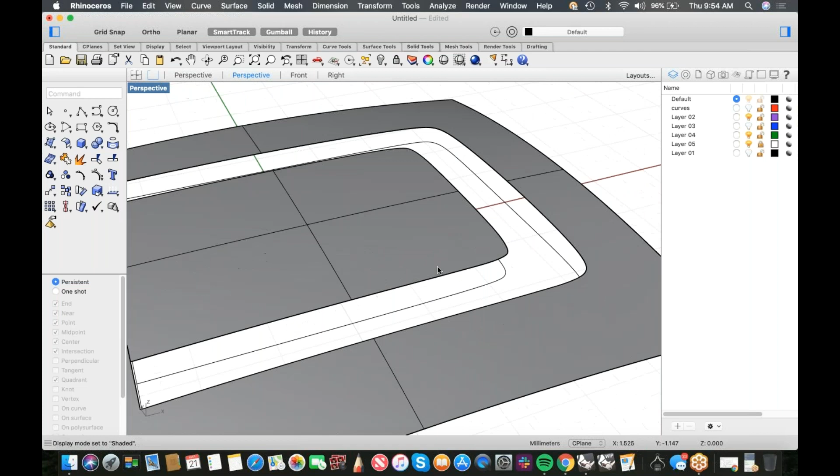If I turn the points on for this, you can see that it maintains the original points. So if I shrink trimmed surface, it changes the points now to fit into the bounding box of what this would be. If I were to untrim it, it would just go out to here. But this is the important thing. See how these points are lined up at the end?

If I grab these points, leaving these alone, and I go to the front view, and I run a bend deformer, and I don't want to start here because I might break it. I want to start a little bit off that, and I bend this up like this. Check this out. If I'm living right, that should join. And it does. So I've maintained my connection here, and I get a nice, even

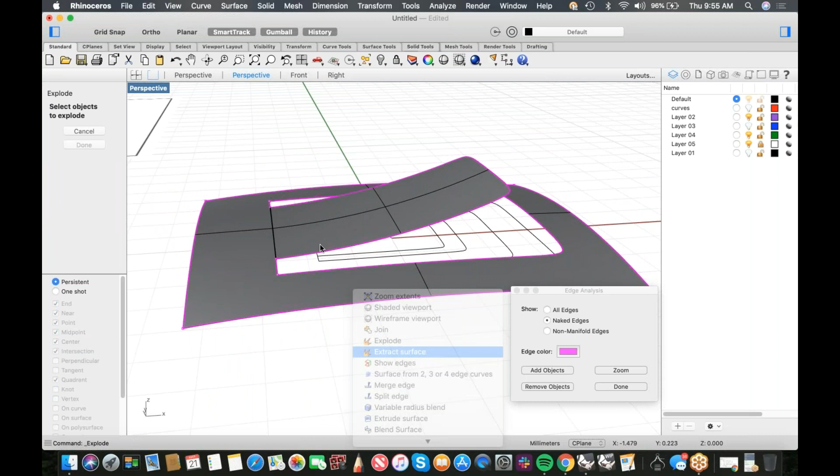connection out of that. And it looks like my points may have moved a little bit here, if we're being honest, which affected my tangency. So let's match surf, and we can't do this because we shrank the trim surface. Oh, all right, fine. Let's untrim it. Untrim. There we go. And you see it only untrims to there.

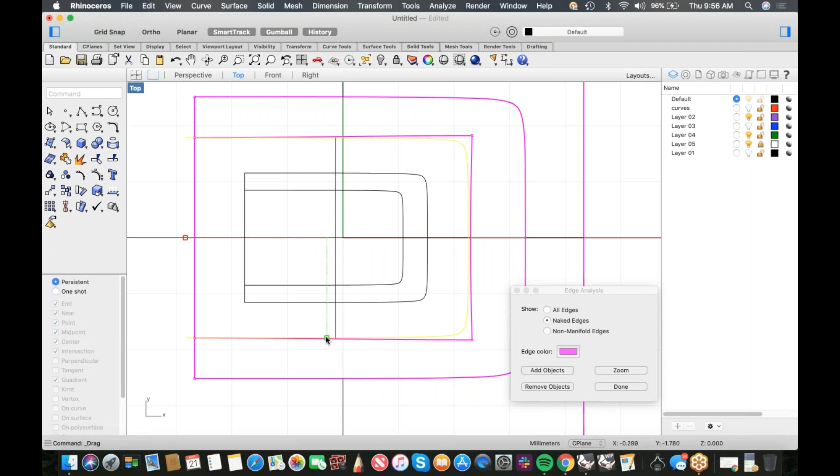So now I can match surf to there, making it tangent. So now it's tangent. Now I can go back up here. I can use this as a trimming object again. And I'm going to just cheat it in just a hair for brevity's sake. There we go. So now that's tangent, nice and lined up, and it's bent up like that.

So to put this back together, I'm just going to use a blend surface between these two, set the tangency, and let's do this in shaded view. And then I'm going to just back this off just a tiny little bit. See if I can adjust that and decide how much blend I want in and out of there. Say okay. These ends might not join, but let's give it a shot and see. And it looks like it did.

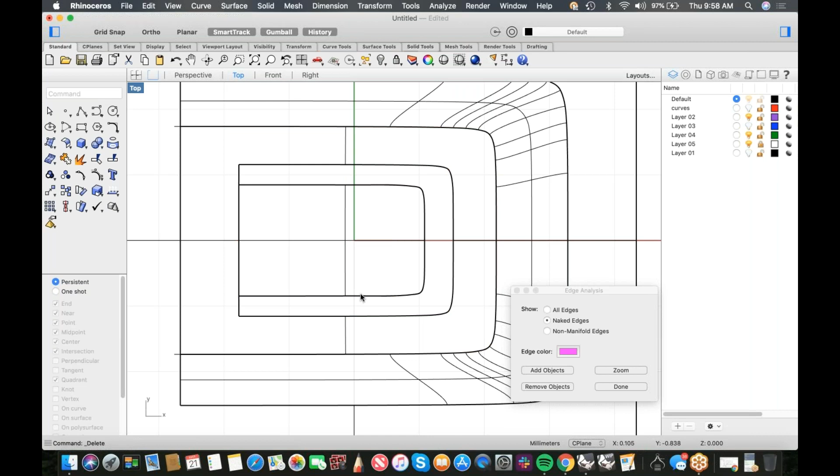So that gives us a really nice blended little bezel there. So let's go back to the top view. And let's make the next one. I'm going to extract this surface for now. And then I'm going to split it using these curves. And I'm going to do the same thing. Delete this. Pick this surface. Shrink. Turn its points on.

And I'm bending the points, not the surface. If I bend the surface, it'll still work, but it will rebuild. And I don't want it to rebuild. I want it to stay nice and light. And in this case, I think we did a better job not messing with this second set of points here. So this should join nicely.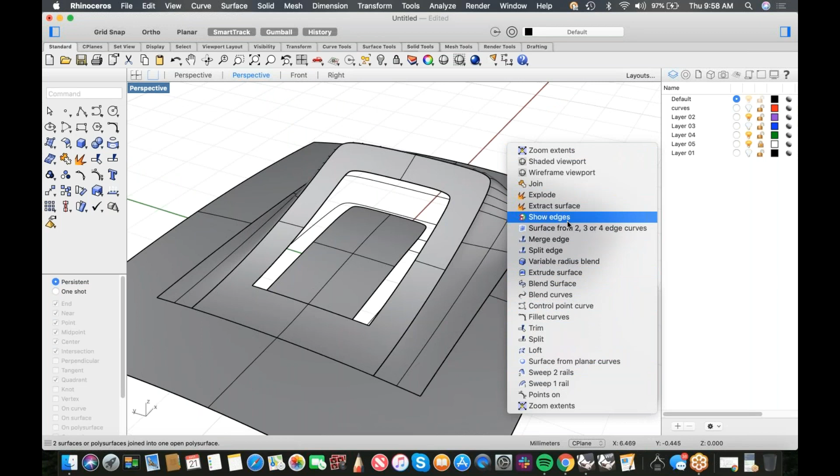And then we'll just go in here and do a blend surface, which I can never find in my list. There we go. Same thing we did before. Now, if this blend is fitting too tightly, if it's not doing what you want, you just need to give it more room. These curves just need to be farther apart, right? But in this case, I'm actually going to call that pretty decent. I'm going to say that's working. So let's join that up and see how we did.

And in that case, everything's joined, which means it's watertight. And we've got a really nice little bezel. Now this is cool because this could be a switch, right? Your finger could come in and pull this way. Or if we flip it over, this could be an intake for a motorcycle. If the back of this was open, this could be an air intake. This could be a little secondary scoop. This is how I do hood scoops on cars, like if I was doing muscle cars and stuff.

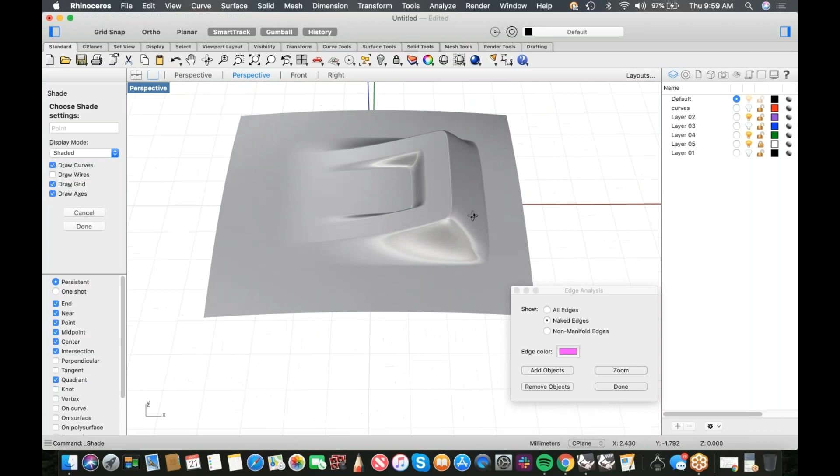Super easy. And I like the bend trick because as long as you're bending the points, it keeps the surfaces all nice and easy to deal with, right? So let's throw another surface up here. We're almost done. I'm only going to do one more.

You guys are like, how long is this going to last?

So let's throw our curves up here. And then let's build this guy. This one I actually did yesterday and it was kind of fun. And I did it with point editing, which is a little bit different than you may think about doing one of these things. So let's go to the front view. Let's draw this out. And I'm going to start at 0, not at O. I'm going to start at 0. And I'm going to draw out 1.

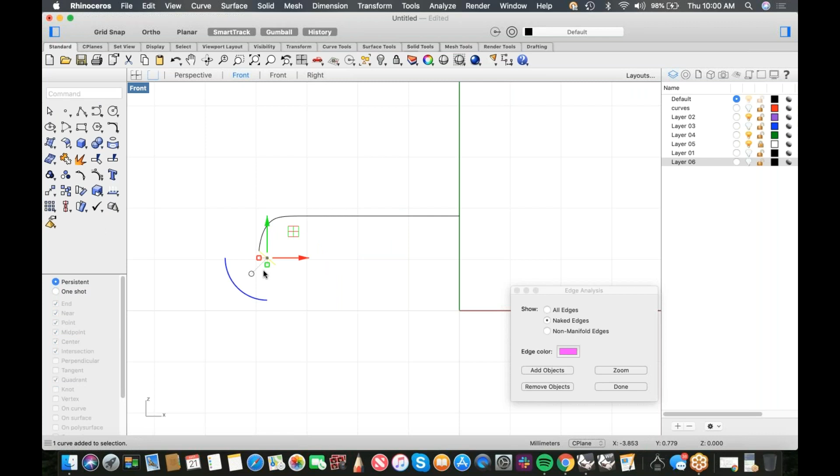There's my corner. I'm going to come down here. I'm going to bring this up. I'm going to use the origin as my center point. So I'm going to bring this up to here like this. And then I'll draw a little step in. And then I'm going to use the same trick I did before, which is just to mirror this guy so that I've got something to aim for with my 3-point arc. And then again, oops, got to pick the right one. Start, and there we go. And the cool thing about this is the center point's always lined up in the middle, so you know you're not going to get some weird, bulging nonsense.

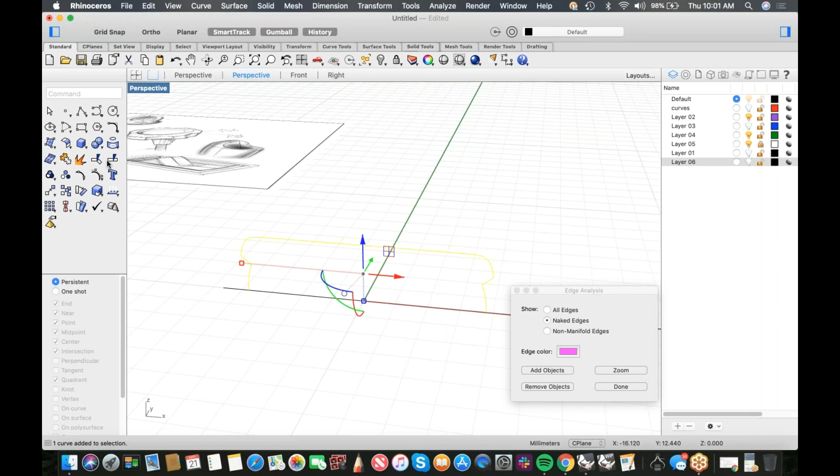And then we'll just simply trim this off. Just make a line through here. Delete that. All right, let's join this up. And let's mirror it. Join that up. And then let's go ahead and revolve this thing. Okay. So we've got this little barrel shape, and then we need to get this little piece to stick out of it. So I'm actually going to rotate this 180 because I don't want to deal with the seam. This is the seam down here, and I don't want that.

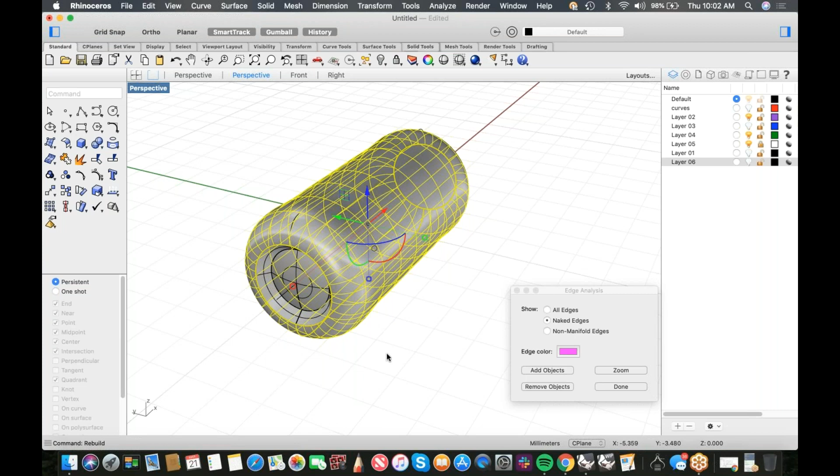So I'm going to extract this like we did before, and I'm going to rebuild it. That's probably a little crazy. Let's do, I don't know, let's do 30. And 12 is probably plenty, so let's rebuild it. And then let's turn on the points. And if I were to just roll through here and take a slice through this, let's start, this is kind of the center point. Let's go to the top view, and I'm going to deselect this side, because I only want to mess with one side. And watch this. Boop.

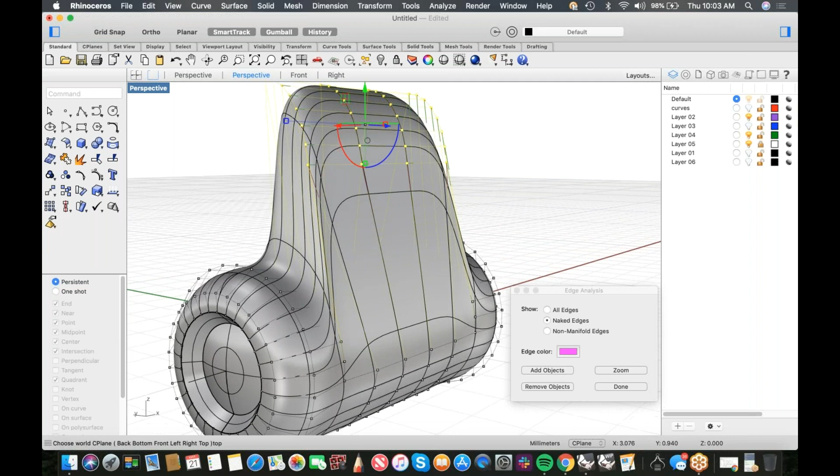There it is. Now, if I wanted this tighter, I would deselect this row and pull that up. And then I would scale these out a little bit to make that a little sharper. Like that. And then if I go to the front view or the right-hand view, I might scale these in a little bit. See if there's any weird things going on. I kind of dig that. That makes kind of a cool little shape.

These edges are a little sharp, and if I wanted to de-sharpen them, I would come in here and probably mess with these guys a little bit. And I would want to do that on both sides, so I would want to get both of these. So I would want to get this guy over here too.

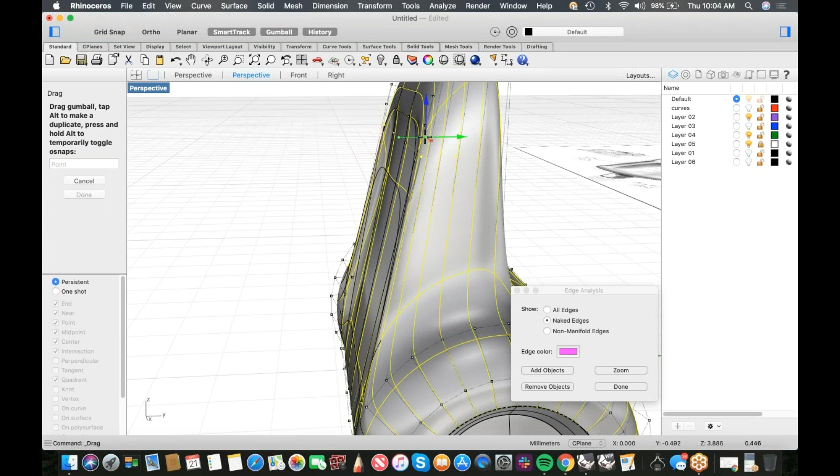But check out what you can do with this. If I were to bring these guys in together like this, and then tuck them in, look at what I can do. How cool is that. There's so much stuff you can do with CV sculpting. And if I even add these guys, we might even be able to do something. Bring these guys in a little bit. Look at that.

Kind of like that a lot. Maybe I don't even want to poke the through hole through that. Maybe I just want to leave it like that. That's really kind of cool. It's got a nice little finger hook on it. Maybe that's a little sharp, maybe not. I don't know.

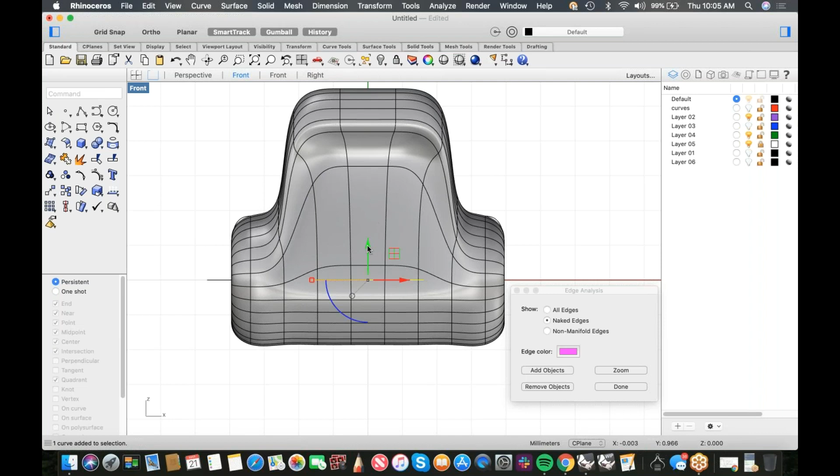Let's add a few little details to it. Let's do a line from the center. And let's start at 0. And just drag out like this. Let's grab that. And let's do 1 there. Option tab. Gotta do some wireframe so I can see what I'm doing. Let's do 1 here. I could use an array for this and actually get them positioned perfectly, but as a concept model, I think I'm okay with it just being a little fudgy.

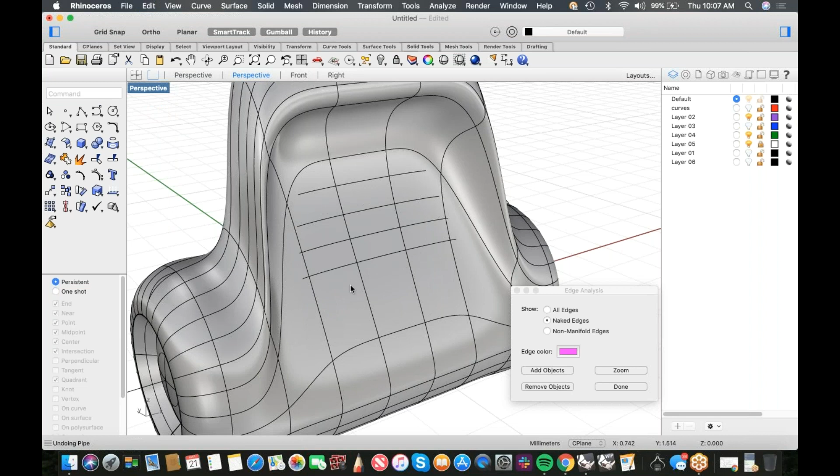And then let's project this onto that. And then let's just pipe them. And I love the pipe that has the rounded ends on it. And I can never find it. So let's do this. Pipe. I don't know why I have such problems with finding stuff in Rhino, in Mac Rhino, but I actually want the rounded ends one. Pipe. Oh, now I gotta find it. It's in here. There it is. Pipe round caps. So let's pick this guy and go something like that.

If I just repeat the pipe and hit enter, helps if I pick the right one. I'm going to pre-pick these curves. Watch this. And pipe, round caps, and then I'm going to just hit, ooh, the setting before. All right. Make me look dumb, will ya? I'm going to pre-pick all of these. Pipe round caps. Let's go 0.1. Do them all at the same time. And then we can just take this guy and Boolean it in. Boop. And that gives us our cool little detail.

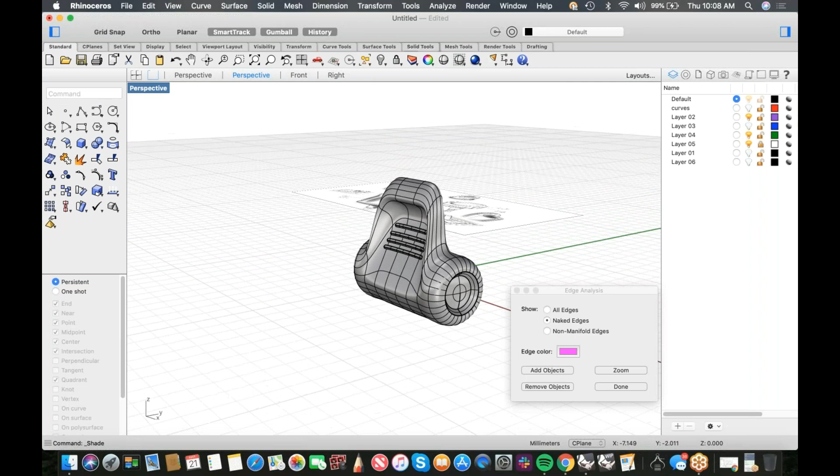All right, now let's bring back this guy. And these two kind of could even work together if I were, oops, let's go the other way. And if I were to take this and join it all together again, there we go. And shift drag scale this thing down. This could even fit nicely in here and be like a little bezel for this thing. Like that. Have a cool little control system built up in here.

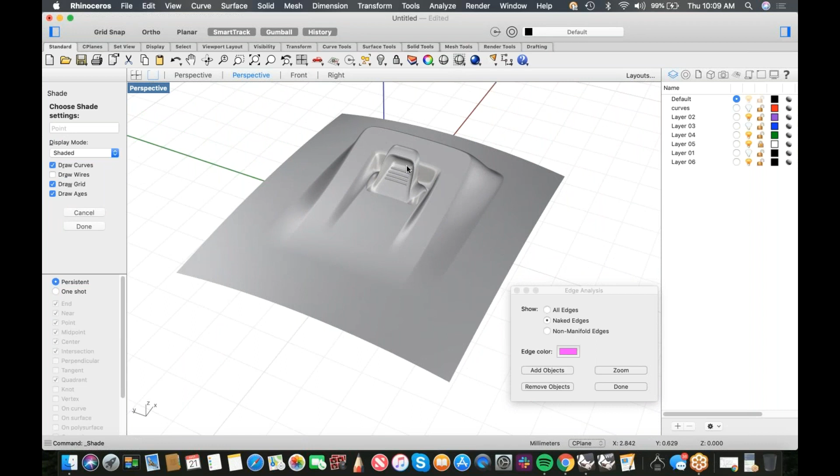And we'd probably build a secondary pocket down here for this thing to sit in, or just Boolean it out, or whatever. But very quickly, we can just build this cool little toggle. It probably would go the other way around because the finger would go in there, unless this was a push button type of thing. But anyways, technicalities. Now that you have this thing, we can play with it, make stuff like this, and make this cool little trigger panel. Maybe that's in a spaceship, or window switches for a car or something.